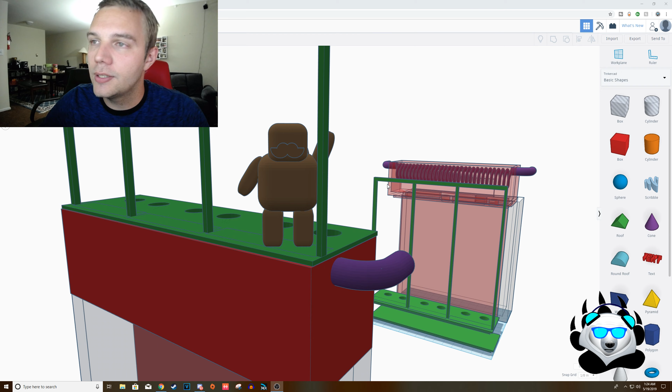This is a setup I've been working on for a long time, a dream project of mine to get this really off and running. Here's Mr. Astronaut right here. I'm working with CAD, and I haven't done CAD since high school, so I figured nothing's out there in the world, so I'm going to design it.

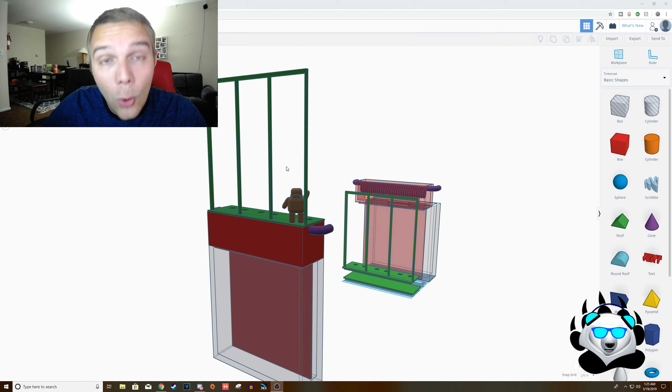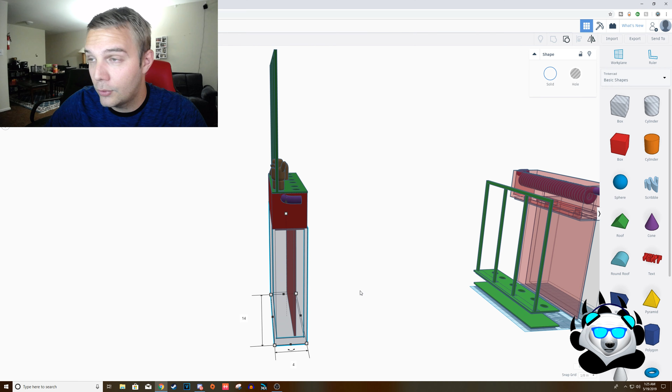So this whole setup is pretty much just a motherboard, and then you have the GPU in the back, and the outer thickness is 4 inches by 14, or you can have it 4 inches by 15. As you can see right here, it's 4 inches by 14. This depends on your motherboard and a few other things, but I settled on this. It can be modified to your discretion if you're going for it.

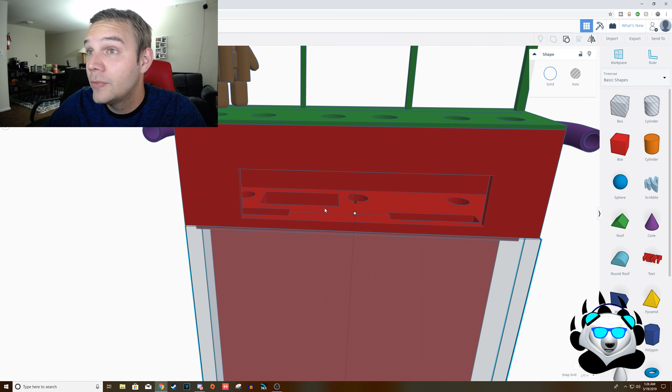A couple things I want to point out before explaining this in depth: this is the cutout for all your stuff, for your motherboard, for your graphics card, for all your USBs and everything else. This is your setup where you would pass through this and put it through, and then you'd have another piece right here, and you'd glue it through, because again, this needs to be an airtight system.

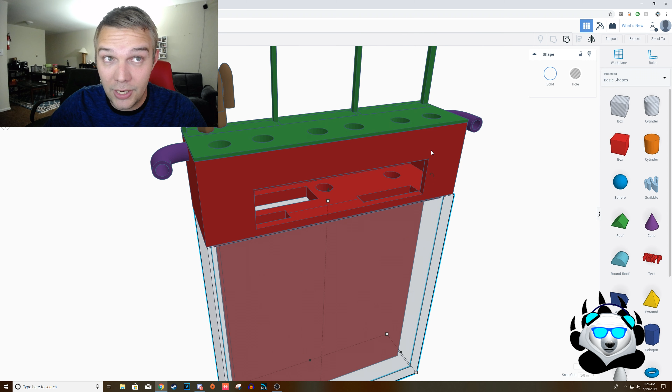So there's a few other things that are going to be here. There's also going to be clamps, here and here, and probably a little bit thicker here for the clamps, and then you just put a clamp right there, and make sure all of these have the gasket on for it.

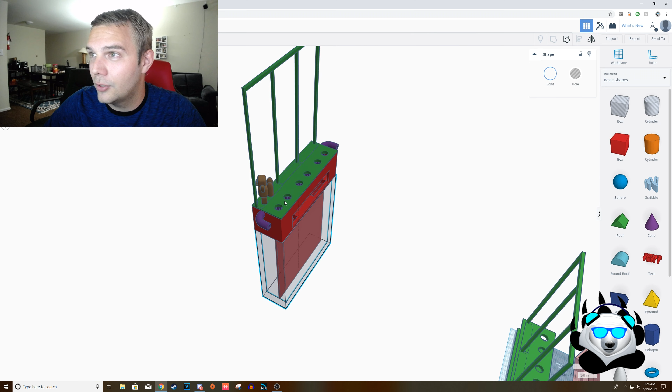And of course, these are like 360 rads. You can put on 360 millimeter rads, and this is for passive cooling without a pump. That's the whole thing about this, is that it's without a pump.

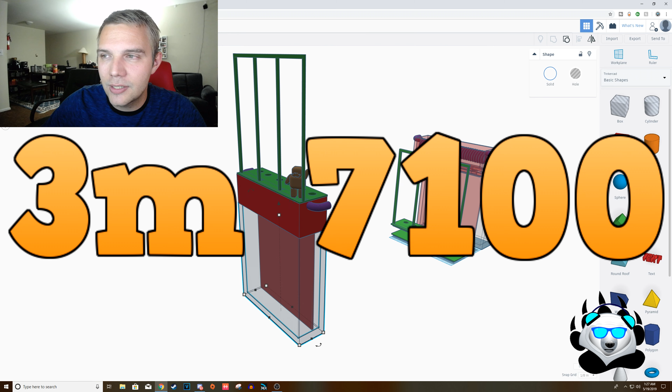And the fluid I'd be designing this all around is 3M 7100 engineering fluid, you can look it up. That's pretty much what a lot of people have been doing, and I've had inspiration from other people where they put this cool stuff out there in these case designs. I just like seeing the bubbling liquid, especially when it's actively showing you that it's working, and that's part of why I like this kind of setup.

So I designed this with two different setups with two different sets of cooling. One set of cooling, which is passive, not needing a pump, just needs to be set up. You don't even need to have fans with this, but I would recommend having fans, especially if you want the condensation to go back down and you want the pressure to be lower.

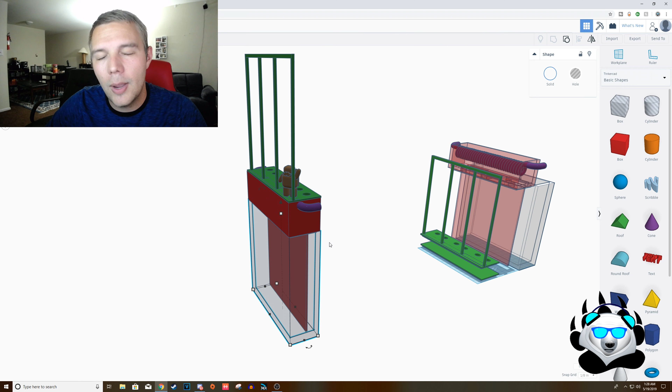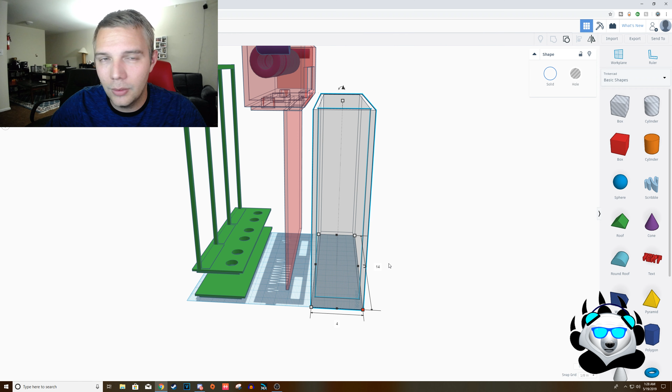So first you have the tank, which is over here. Again, the measurements can vary, but the design is the same when it comes to this, so it's 14 by 4. That's pretty much the case for where you would be putting the liquid in and everything else.

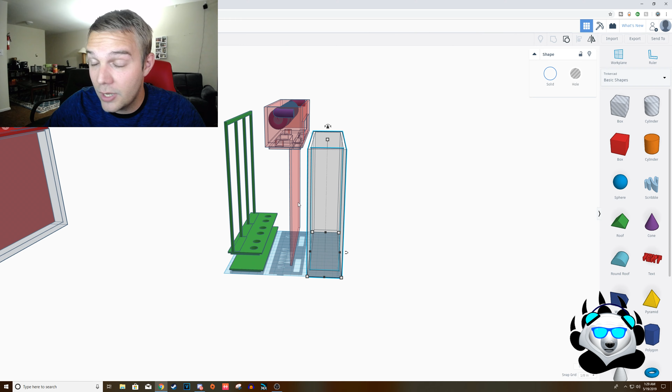You would put your sensor at the very bottom. Now, I would recommend doing this on the motherboard side so that you can be fine. There's also the GPU side. So this is where things get interesting for a lot of people, especially if you don't know a little bit of thermodynamics.

Because everything is in a thermal regulatory fashion, I have this kind of set up in this specific manner.

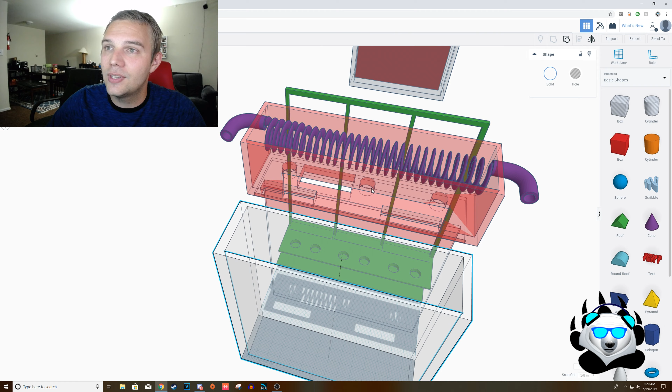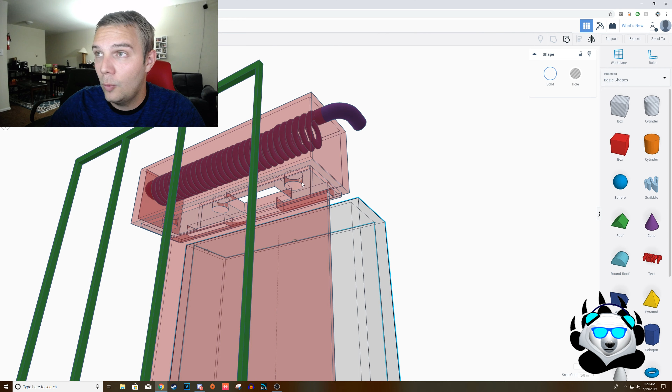So the first part, right here, all of your peripherals that you'd be seeing in the back would be right here. You would file all of them through here. These are just extra holes so that all of the boiling liquid will go through here. The condenser is right above this area, which would be for the liquid and stuff.

I just did a quick drawing for it. Again, this wouldn't be to scale. It would be suspended by the two pipes that you would have fitted through here. Again, it's going to be like this.

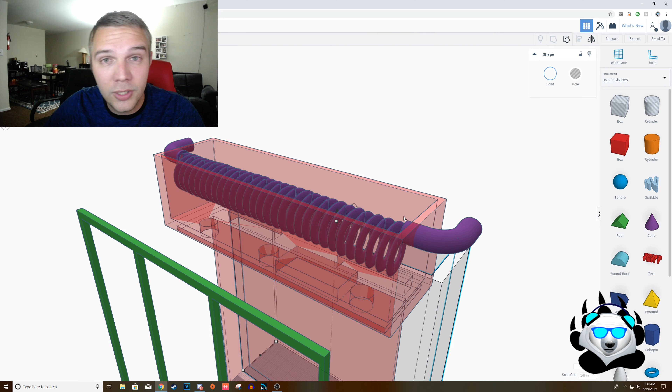This is one phase of the coolant system, which if you had something directly connected to it would be either a refrigerant system, a water system, or a pass-through system—some form of system which would actively cool it using either glycol, water, or refrigerants. Some form of this can be done.

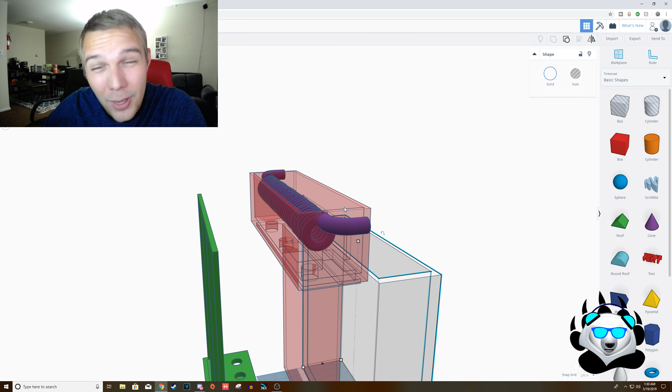Of course, you can do it in liquid nitrogen if you really wanted to, but I would not recommend it, especially in this setup. This is mainly for a vertical, like a 2U server setup more than anything else, and that's how I have designed this.

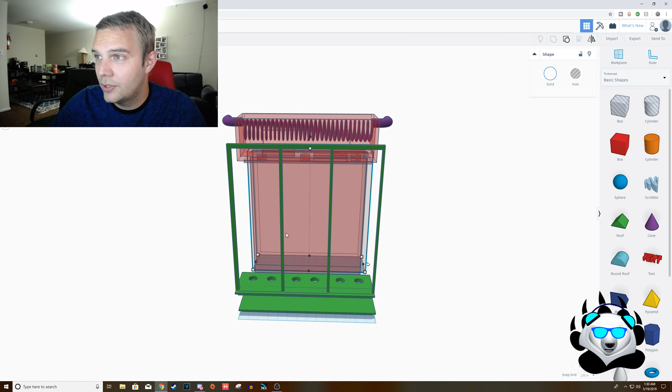So again, you have those holes, and then you would have a PCI plane which would go around this little thing right here. There's just enough clearance for you to bring a PCI cable around while it's outside the actual setup, and then you would be able to mount it on the other side.

So because it is mounted on the other side, now you're thinking, where's the heat sinks? There is no heat sinks. It's literally just bubbling in, and you can do it right on the IHS.

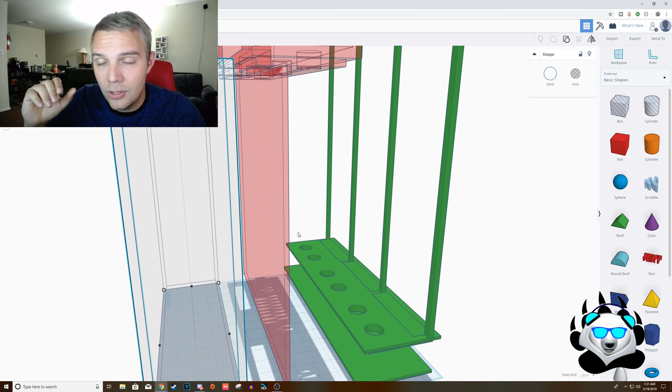Now, when you want a little bit better thermals, you would want to scratch up the IHS so that you can actually have enough surface area, instead of the other way of thinking when it comes to connecting a water block or an air cooler or whatever.

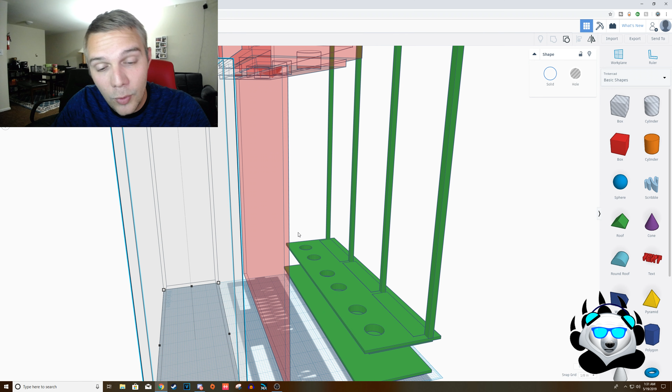When it comes to this, you want to have as smooth a contact as possible so that when you apply the thermal paste and put it on, you have the closest connectivity to your actual contact point so that you can dissipate the heat.

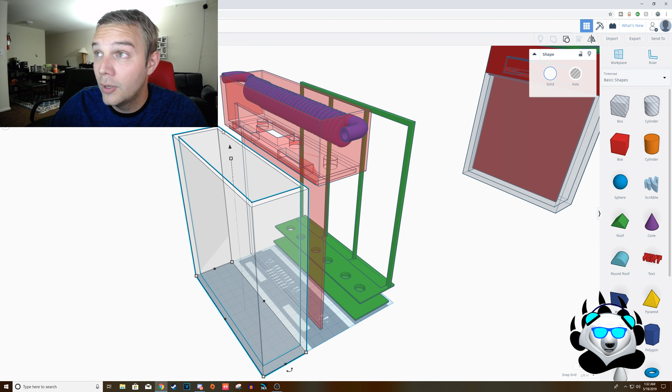So with that said, this is an active portion of the cooling, which you would do in a separate second stage setup, especially if you're going to go for overclocking on top of this as well. Not only including the actual air water cooler setup that I have set up, which I will explain in a bit, but with this setup, it is extremely overpowered already when it comes to it. You can close it off.

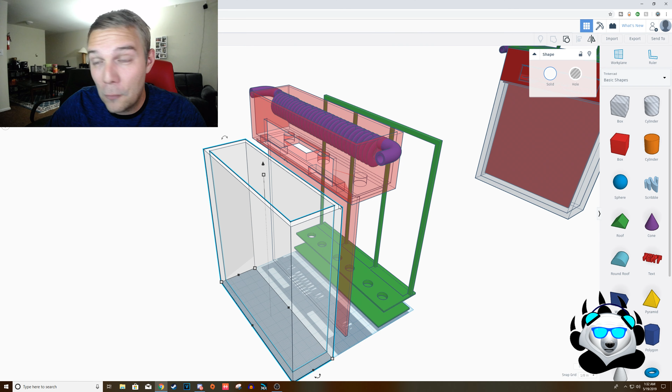Now, I have this in modularity, so if you want to, right here, there is the actual cap, so you can actually seal this up. You don't even need to have this.

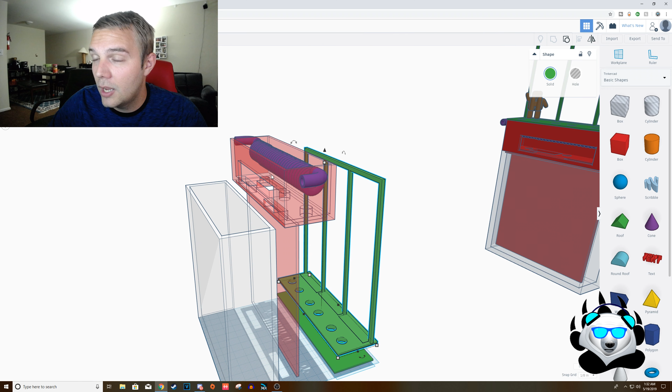If you're going for an active system and you want the smallest surface area possible, with cooling somewhere else in the server rack, or just somewhere else entirely, you can just seal this up and you should be good. As long as you have your water system running, you can be hyper efficient with this route.

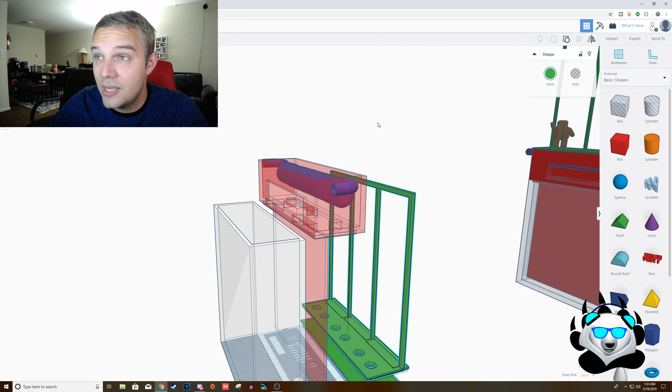Now again, this is just for 1 unit, so if you're using your gaming PC or whatever, this is something that I have pretty much designed and thought out in this way, shape, and form, where it would be the easiest to just say, that should work.

And because all of the gas is rising, it would not only go through there, but it'll also have a passive cooling effect on the very top, doing condensation in order for it to drip down. Now, this system works with both things working together if it was really necessary, but again, it's not.

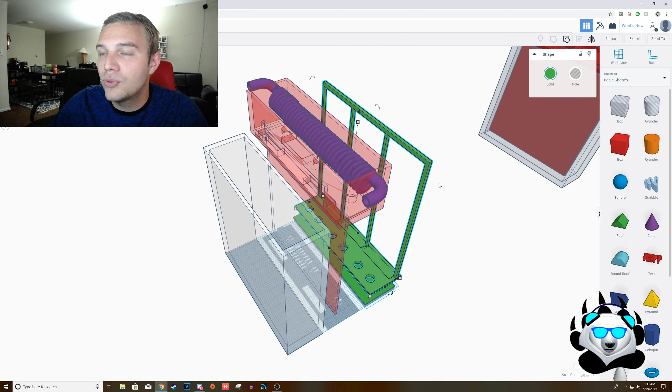So this is a separate unit which is on top of this right here. So you have right here the intakes for each one.

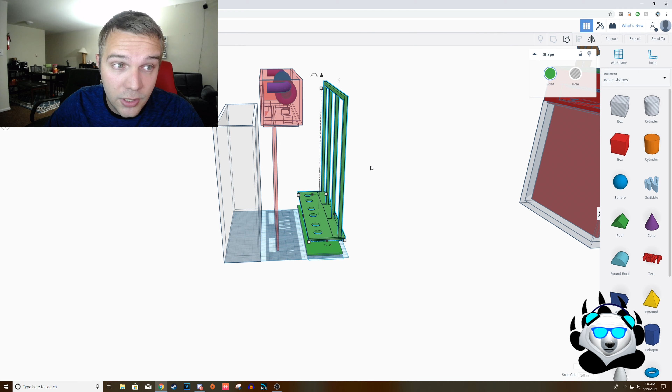Now, because the air is rising, you'll have a higher pressure environment when it comes to having the two systems, if you just had this as one system running rather than two. Because you're having the one system running, you actually have this set up to be really nice when it comes to this kind of integration.

Now, I designed this — this can be for like 240 mm rads, or whatever, but I have this for 3 of them. Now you're probably wondering where the power supply would be going.

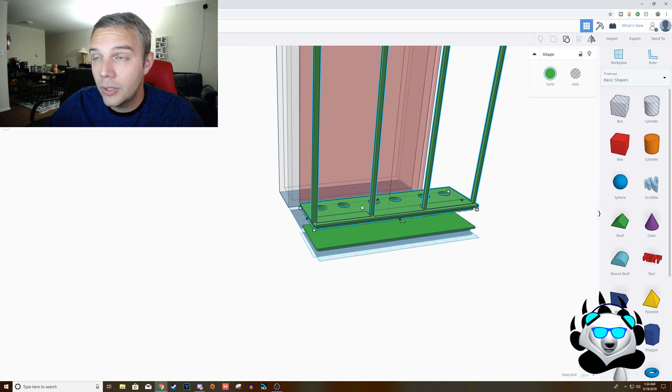That would go right here. You can funnel it through the holes, or you can just completely drop this area and CNC something different where these holes are. You can put all of your connectors facing down so that your system is still within the loop and you don't have to have an extra connector going through everything. Then you just have the AC cord sticking out on the top, and the switch on the top, so you can do that type of maintenance as well if need be.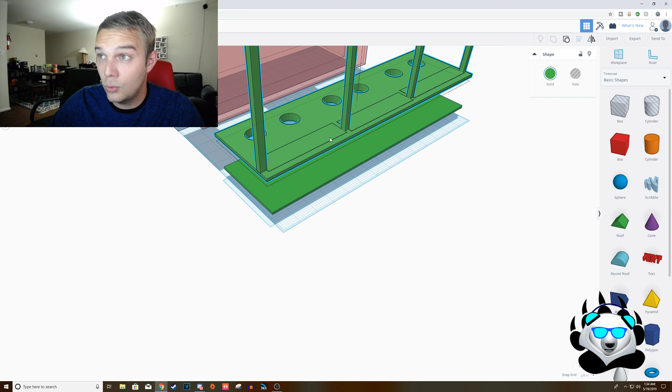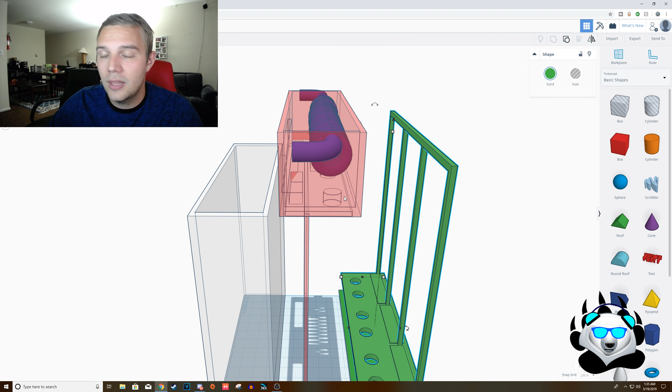But again, because everything is going to be snapped together, there's going to be a gasket here — and I should say, from the red point, because that's the center point of everything. There would be a gasket right here, a gasket at the very bottom, and that's it. Two gaskets, and it's three parts. It would not be a lot.

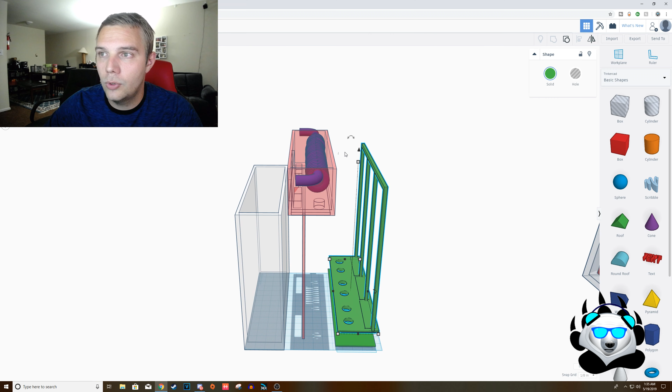Now, if you're wanting to have this type of thing built, it's going to cost you if you're custom building it on top of everything else, which is what I'm going to be doing. But you want to have a completely sealed unit when operating this as well — it needs to be airtight. You're going to make sure you can operate between 1 atmospheric pressure and 2 atmospheric pressures in order to be at its very max.

And again, it is a very clean and neat build. Make sure that everything is here. Now what was the other thing I wanted to touch on?

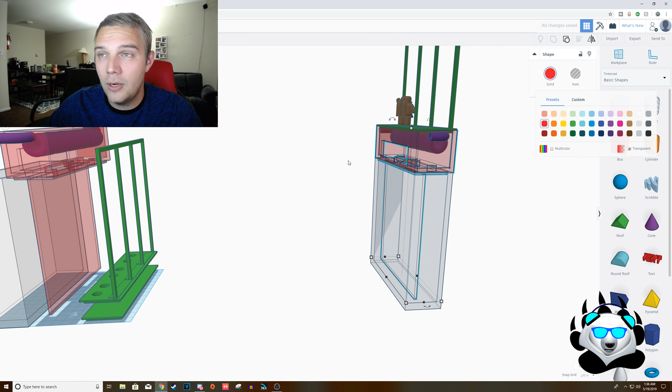The other thing is, when I make this transparent, you'll see here — I'll zoom in because this is weird. I made sure that if you made water cool fittings, they would not interfere with the actual condenser, which is right now... I'm trying my hardest right now because it's being weird, so that it would not hit. So there is a good amount of clearance when it comes to this pipe and over here.

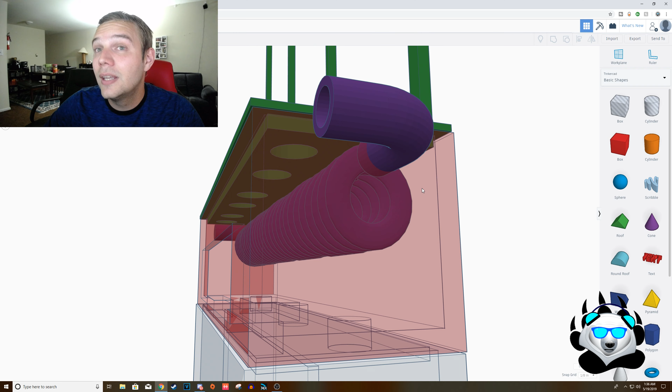So the tolerance is 0.2 inches, and I don't know what that is in millimeters right now — it's almost like 1:40 in the morning. So again, it's pretty nice that I had this set up. Everything is in line, it's just really nice.

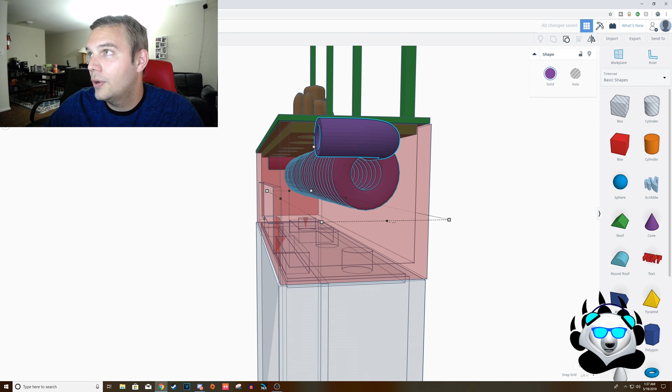And I just placed this here for conditional reasons — it's not there just for... of course, this can go lower. This can go lower if it really wanted to, this can go higher. You can have everything set up and compartmentalized this way. And again, it's really simple.

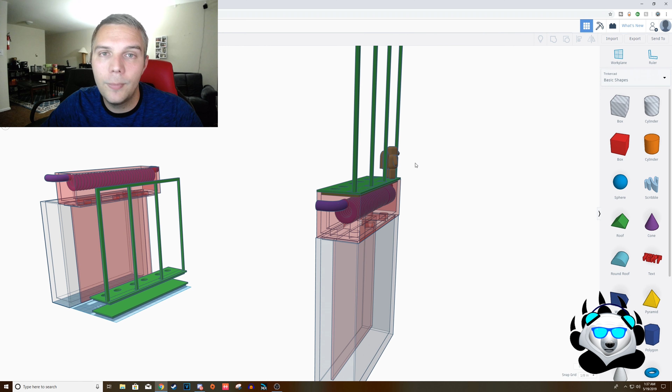If you have something like a 16U setup at your place of work or whatever, this is acceptable. But if you don't, you can just throw this off, and make sure everything is good. You have all of your linings and setups, because at max, this is only 18 inches high.

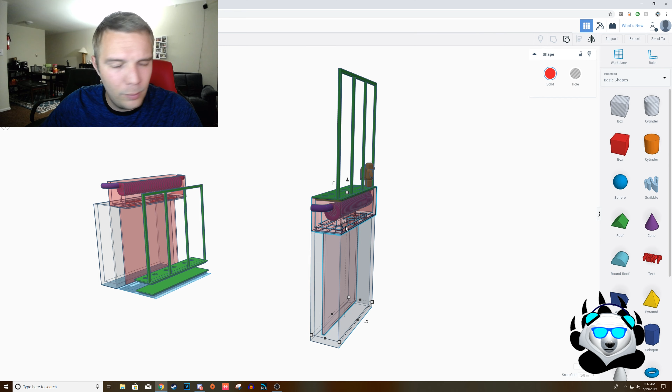So when you're setting this up, maybe you want to put a radiator behind it — not the motherboard side, because you want to actually see the motherboard side, so you would do it on the graphics card side. You would put all the stuff behind here, so again, where all the I/O and everything is, you would put everything just...

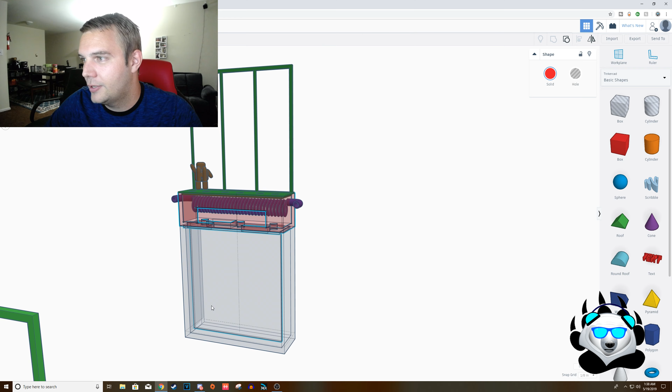Having a hard time — there we go. You would put maybe the power supply right here, and then you would put maybe like two 360 mil rads right here with a spacing clearance, so that you can have some fans going through it, so you can have some airflow.

Of course it's not the most optimal solution, but you'll be using this condenser, and then a pump, which you'd probably put underneath the power supply since that would be the lowest point. You need some form of lowest point of contact, and you work around that design. It'd be pretty cool to have a little compact case controlled by 3M engineering fluid that's boiling. That's kind of why I'd design this.

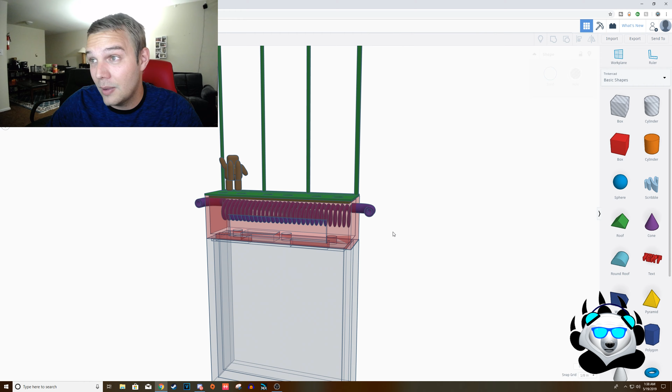The whole concept is that I'd design this just for the cooling, because it'd be so dope to just see boiling liquid. I made it so it would be the smallest volume possible of using this actual liquid, not like converting a water block on a CPU and making sure the radiator is on top of a case. It wouldn't be an exact radiator, more like a pool area, with some Peltier systems on top.

I don't want to do that. I would rather have something that's completely mechanical. The less things I need to worry about, the less failure I'd have throughout. That's why I'm using off-the-shelf stuff for most of this, and same thing with regular copper tubing that I'd just bend a lot.

This is just for example purposes. I'd be like, yeah, this is pretty dope, this is something I would like to do. I'd probably use some form of polymer to keep it together, and then seal everything to make sure it's fine.

This is just a draft I had as a personal dream of mine, to actually put this out there in the world and be like, look, this is some pretty dope stuff and you might like it. This might be something you could even do, and you could even have this on a wall mount if you wanted to show off everything on one side.

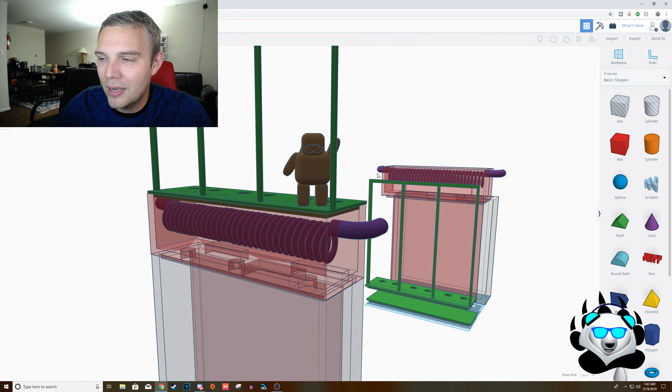And yeah, I'm tired. I spent a lot of time working on this, and hopefully I can get this idea into fruition. I would love to be putting this kind of design out there, because again, this is my dream build, and I just had to crank down today and put all my passion out right here. I was just like, you know what, I'm gonna get this design done. And yeah, have a good one. Peace.